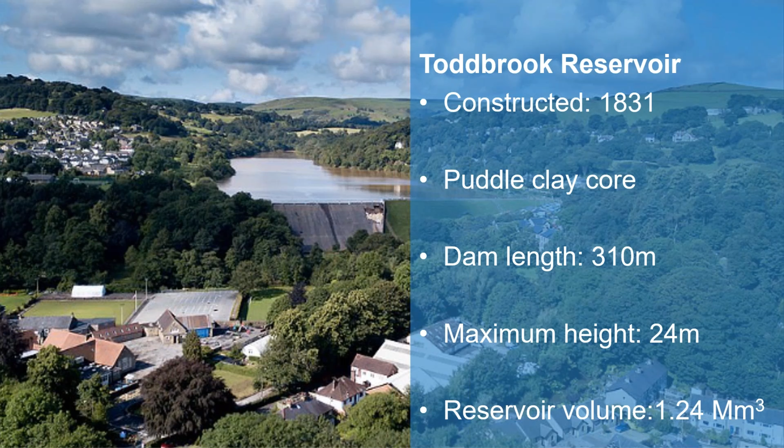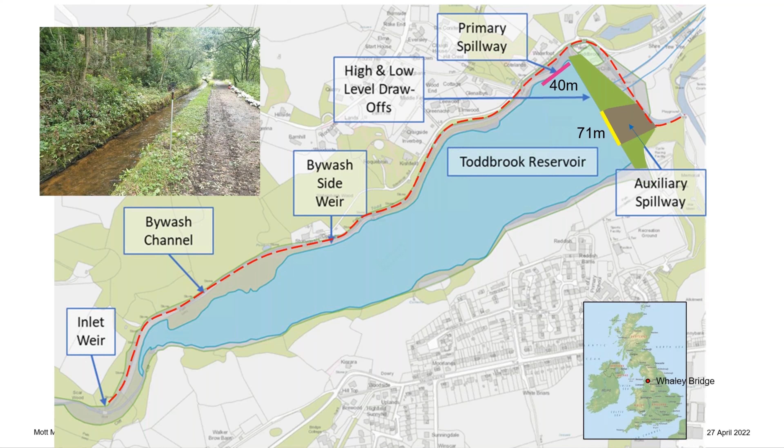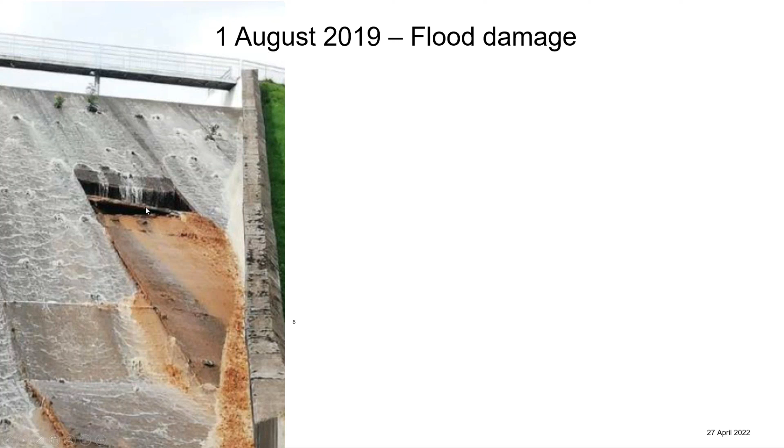Following the spill on the 1st of August, water started eroding from underneath the spillway, causing a scour hole, and some of the concrete slabs on the auxiliary spillway began to collapse.

In response to this, the inspecting engineer, CRT and police issued an instruction to evacuate 1,500 residents who live downstream in Whaley Bridge.

They then put in place emergency works to prevent overtopping of the damaged area, placing sandbags on the auxiliary spillway crest so water no longer ran over the crest into the scour hole, and then stabilized the damaged area.

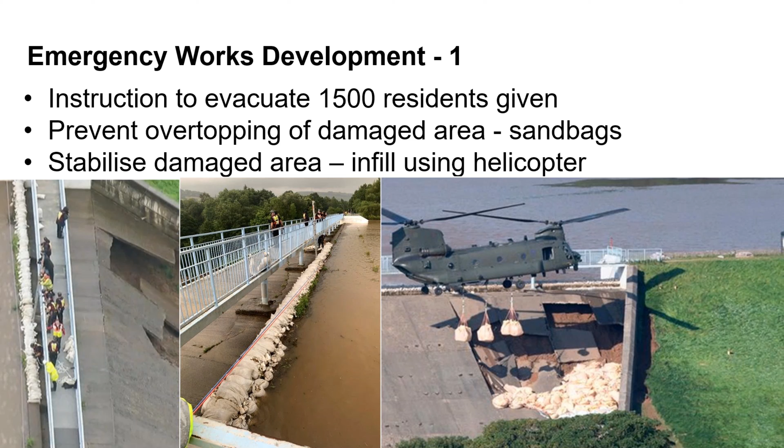This is a photo where a Chinook helicopter dropped aggregate bags into the hole and covered it with concrete to seal it up and provide a more stable situation.

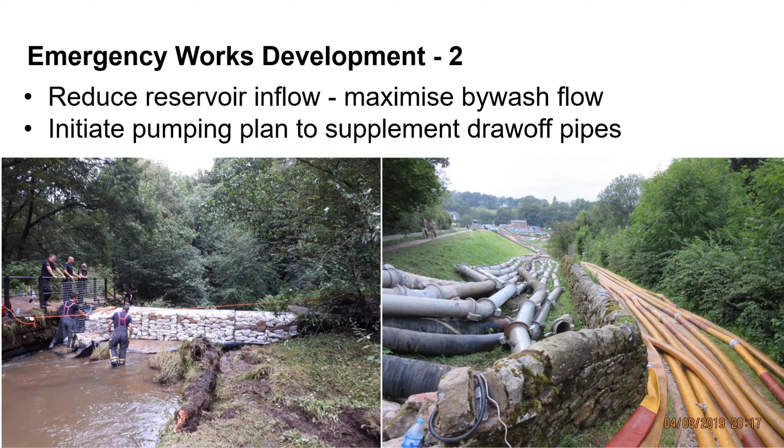They also put in place a pumping plan to draw down the reservoir level with a number of temporary pumps, including the fire service, who brought that level down.

The reservoir level was drawn down by 12 meters from top water level to about 4% full within 6 days. At that point, they carried out a hydrological assessment and dam safety assessment to confirm the situation was safe, allowing residents to return.

That assessment was completed on the 6th of August, and the residents were allowed to return on the 7th of August.

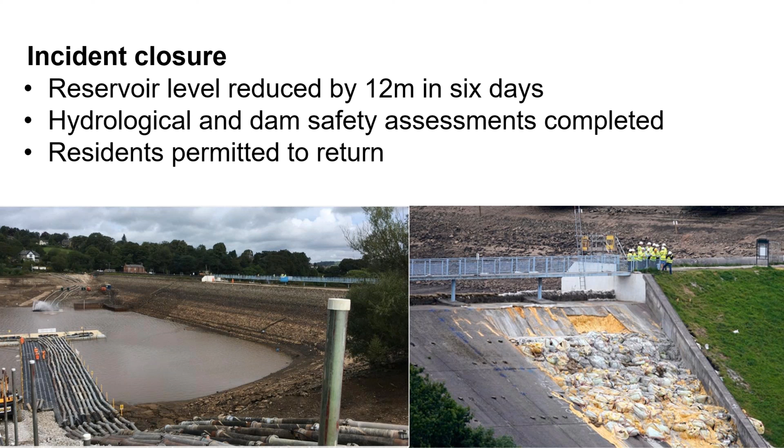After that, the pumps remained on site with the reservoir nearly empty. This is a photo of the submersible temporary pumps with the level drawn down.

They then maintained a full-time site presence to be able to respond in case the situation got worse or the level rose. It was a very active, high profile and high risk site, so there was a heavy site presence.

After that they put in place contingency planning to decide how to manage the site safely, and also worked out a more permanent solution to reduce risk.

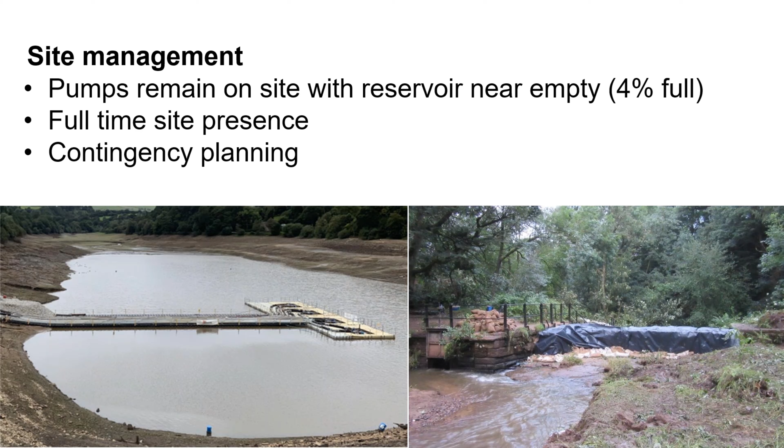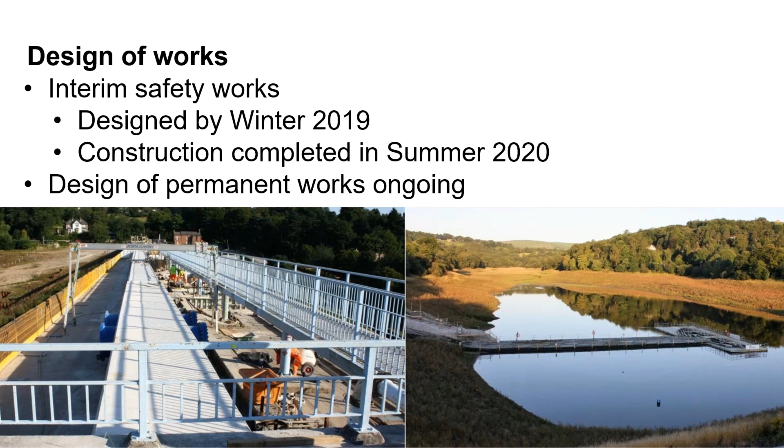So that's a dramatic story, but there's a lot of on-site work there. And how did flood modelling support the incident recovery work?

When we talk about this, the important thing to remember is what's the purpose of modelling. Modelling provides evidence to make better decisions with more confidence.

This is obvious with all cases of modelling, and it's particularly evident if you think back to the last couple of years and the government response to COVID, and how much of the decision making that people were making under high pressure had to be balanced and supported by the evidence that modelling provided.

Without that, if you're trying to make decisions in a high pressure situation and you don't have better information, you've got to trust gut feel, and it's easy to make decisions you don't feel so fully supported by. So this is a real benefit that modelling can provide in any sort of environment like that.

So in this case, we used Flood Modeller and developed a routing model. It was a fairly simple model, and Flood Modeller is very well designed for looking at this kind of problem. We've used it a number of times for reservoir safety work. In a very simple case, a reservoir routing model has four main components.

It has an inflow arrangement at the top, with the catchment flow into the reservoir. There's a storage element, which models the change in level with different changes in volume. There's an arrangement for the outflow of the reservoir, which models the outflow, and then the downstream boundary to take the water away.

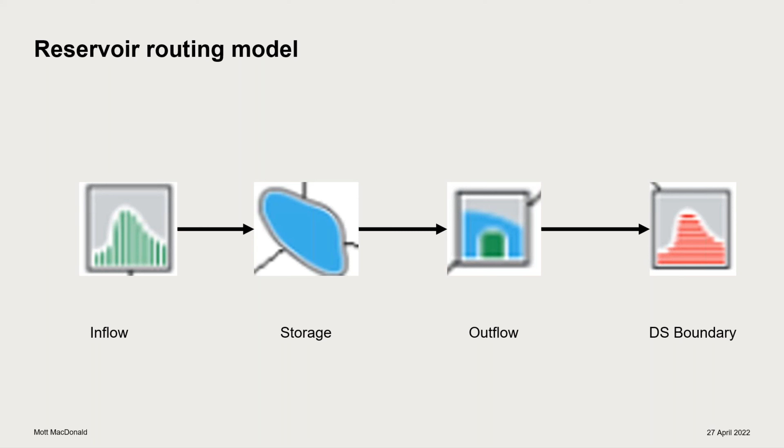And with that, we can estimate the risk of water getting to particular heights—for example, in Todd Brook, the risk that water will get over the primary spillway or the auxiliary spillway for rainstorms of different magnitude.

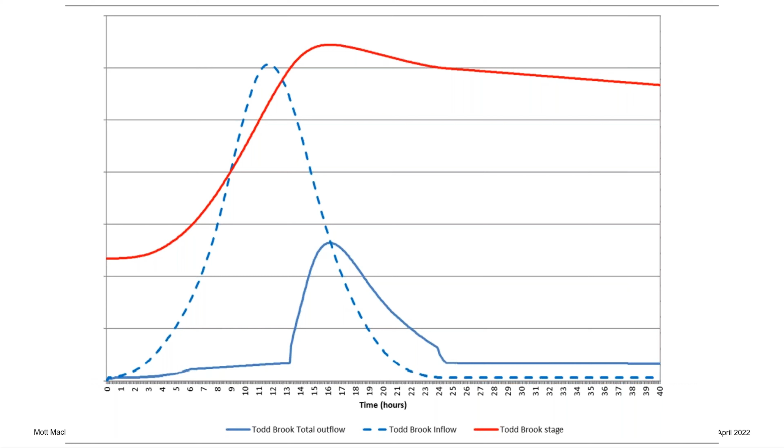So, the modelling timeline following the event: we were pulled into the team to work on the project once the reservoir level had started being drawn down. We were tasked with doing an initial hydrological risk assessment, mainly focused on how likely it was that the main dam would overtop, or how likely it was that the auxiliary spillway would work.

This was obviously a high pressure situation with a lot of media coverage and scrutiny, so we were very time constrained. We looked through the easily available data from CRT records and on-site measurements, and used theoretical estimates of things like rating curves to try and build a quick routing model.

This was very conservative—it didn't account for lots of the elements in the system, but it accounted for the main ones. We knew that was going to give slightly conservative results, which was fine, because in a case like this you want to assume the worst so you can make a better decision.

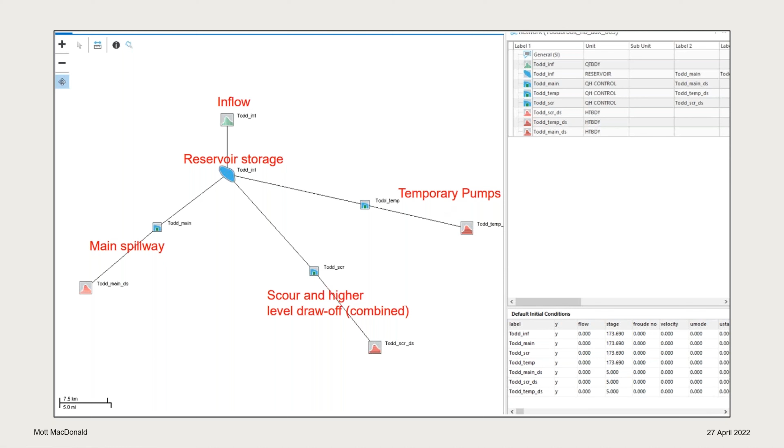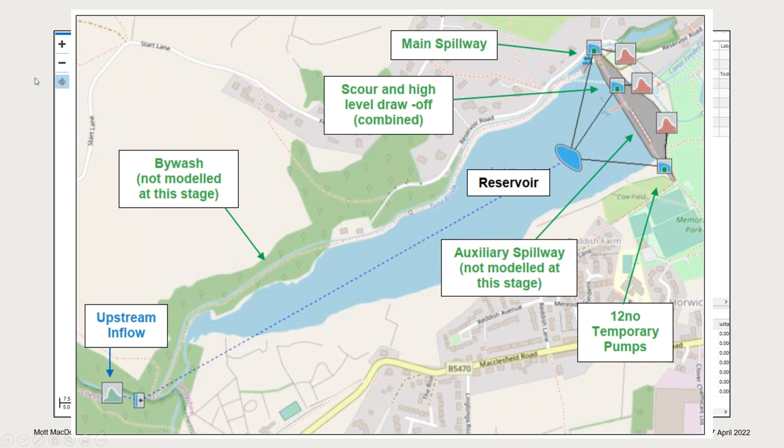But we knew there was missing information, particularly around the primary spillway and the bywash, which we identified as an important area for understanding the system. So we commissioned a new topographic survey of the bywash channel, but that would obviously take a long time to arrive, and we needed the information as soon as possible.

So we created an interim model where we went on site and picked up survey at the bottom end of the bywash. We did the survey in two different stages—first picking up the model of the survey at the bottom of the bywash, a critical area, which was available much more quickly so we could improve our estimates and give the site team more information. We added that key detail, and wherever needed, used conservative assumptions so we were always slightly overestimating the risk.

And we used that to develop initial site plans. This is a schematic of the updated model. The difference from the previous first stab at the model is this extra element we've added here on the primary spillway. As I said at the beginning, this spillway has a risk of becoming drowned out in some of the larger floods, if too much water goes down the bywash channel, it could back up and drown out this primary spillway.

We've also added an initial estimate of what the bywash capacity is using an abstraction unit from Flood Modeller Pro. This model effectively allows a certain amount of water to pass around the reservoir, so it doesn't get diverted into the main body, which is important because in each case here, we were assuming that the reservoir was drawn down by 12 meters, and it was all about how much the pumps could draw that water down.

We use this model to answer a lot of on-site plan questions and about the contingency plan, and to do some what-if questions. For example, what would be the benefit of reducing the number of submersible pumps on site? How would the system respond in floods if there were, say, 8 or fewer pumps on site, or if some were held back for redundancy, or whether the trust could scale back some of the pumps they had on site. I think they were costing about 17 grand a day to hire the pump system, so obviously there was a big driver to try and only be using the pumps we needed.

Similarly, we used the model to develop a rudimentary forecasting system. We ran the model for a number of floods with different rainstorms, with different depths and durations. That enabled the trust to have a lookup table, where they could look at the forecast rainfall, the depth and duration of that rainstorm, and then easily look up the level that the reservoir was forecast to get to. So they could start to have some confidence, and they didn't have to look so nervously every time it rained about how the reservoir would respond, but instead could understand when they needed to mobilize on site and warn the site team that there might be an issue, and when they maybe didn't need to do that.

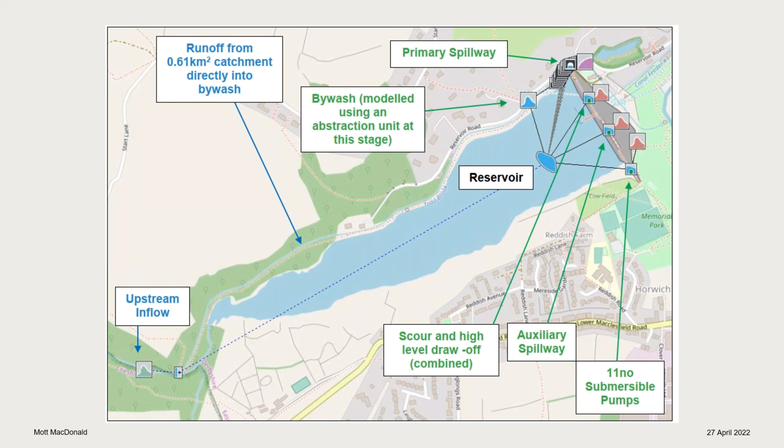Whilst we had that model, we were always aware that there were some uncertainties in it and some extra things which weren't included. So the topographic survey arrived, and we had that data at the beginning of October 2019 - about 2 months after the event. We used that topographic survey to fill the data gaps, particularly around the bywash channel.

At that point, we had a full model. We could do performance testing. We verified it to check that we were confident in the answers. Then we could repeat some of our initial work on the site plan to improve those estimates and answer a number of other questions. And as more data became available, we could continue to update that model with new extra bits of detail as and when it was needed.

This is a schematic of our updated model, and you can see this is what I would call the full model - this is where the modelers start to relax and feel like they've got all the information they need in there. The main difference here is this very detailed model of the bywash channel around the side of the reservoir, including some of the key structures along there, and also a better idea of the intake to the reservoir, and then some lateral inflows to distribute the water more realistically, or more appropriately, across the model.

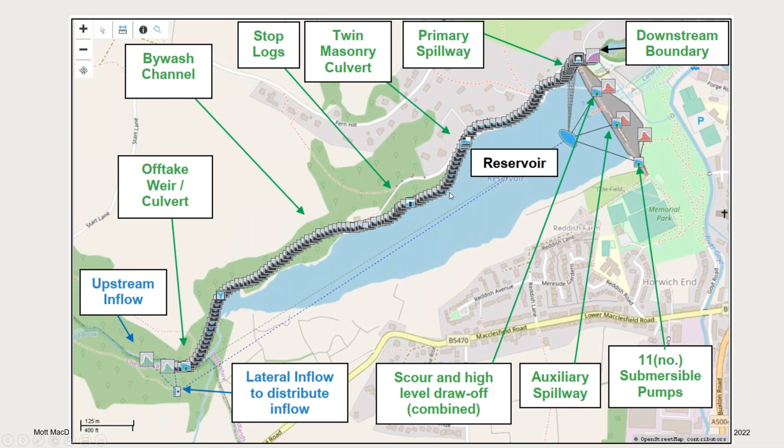So this detail looks really heavy on the bywash. It looks like we've got a lot of information here, but the main risk, we were doing this to try and target this main risk.

Which we saw in the temporary case, which is about the bywash. This is an example of a typical cross section of the bywash, which was put in with river units. You can see the channel is rectangular, and then next to it there's a footpath which sits between the channel and the reservoir.

And the risk and the concern was that by diverting all the water into the bywash, we'd be putting a lot more water than it was designed for through that bywash, and that meant there was a risk that water would overtop this footpath, would scour it away, and then would mean that the bywash no longer diverted water around it, but in fact all the water went straight into the reservoir, which would mean that it would all have to be pumped out, and it would mean that they had a lot less control over the lake level and the reservoir level.

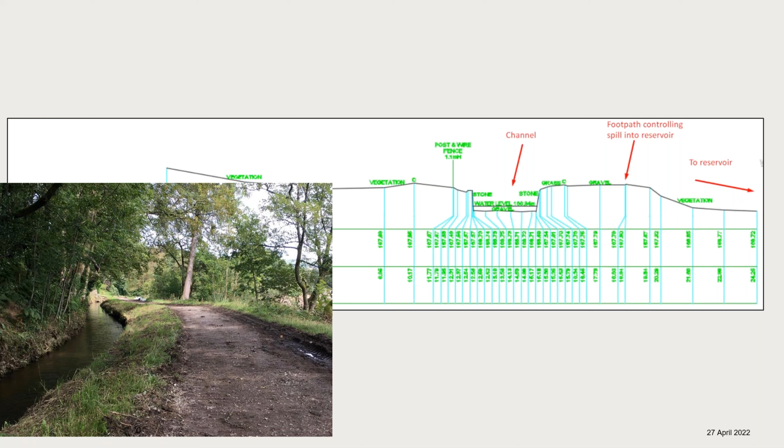So that's why we put all this additional detail in, and the model was really successful in achieving that. This is an example of the long section through the reservoir, through the bywash channel, sorry, and from there you can see it really highlights the locations of overtopping.

This blue line is the flow profile when the bywash is flowing full, and then the tan line shows the level of the right bank of that footpath between the channel and the reservoir. So you can see it highlights these locations where water is first likely to overtop, and then some other areas in other places.

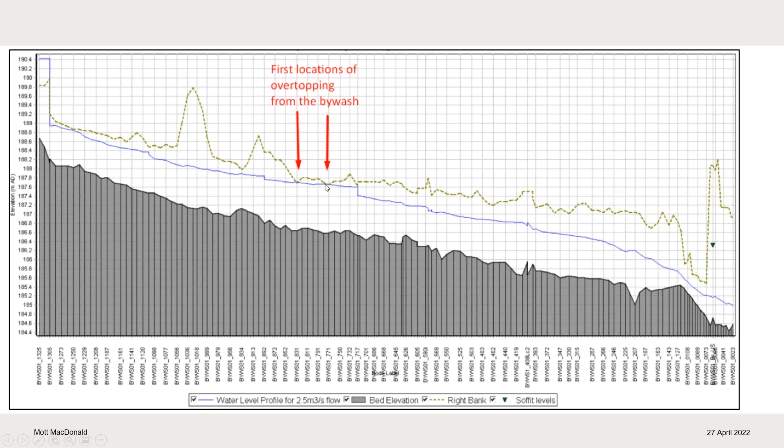And from there we could go on site, and the site team put up sandbags on the footpath, and then they could add that to the contingency plan, so that if there was a risk the bywash would be full, they could send someone there to mobilize on site and monitor it and react to the situation. So we could be a lot more targeted, because this bywash is about 1.3 kilometers long, so it's quite difficult to have a team there all the time to monitor every area.

We also used the model to site a new gauging station, which went through to the Trust's online system, so that it fed the data through, and then we could target that at the right location, the place where the water would be most likely to get out. We could use that as well to improve the flood warning system and develop something slightly rudimentary to be able to predict risk with a good lead time.

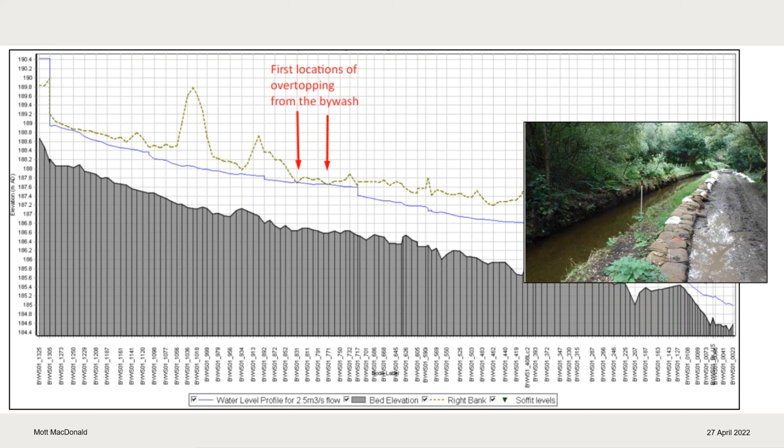With that final model, we could review our initial results and assumptions, develop the contingency plan, and we also used that model to design the interim safety measures, and provided the evidence for the government investigations as they went forward.

So I think in terms of reflecting on this, we used a real risk-based decision-making approach here, and it was sort of forced really, but it was a really good example because we were very time pressured. This is the way we had to adapt to it.

So if you plot these four stages on a graph, you can look at that over time. As we added more confidence, we gradually added more confidence and detail in the model. And in contrast, that meant over time we reduced the risk to the site. We were able to provide better confidence for people to make better decisions there.

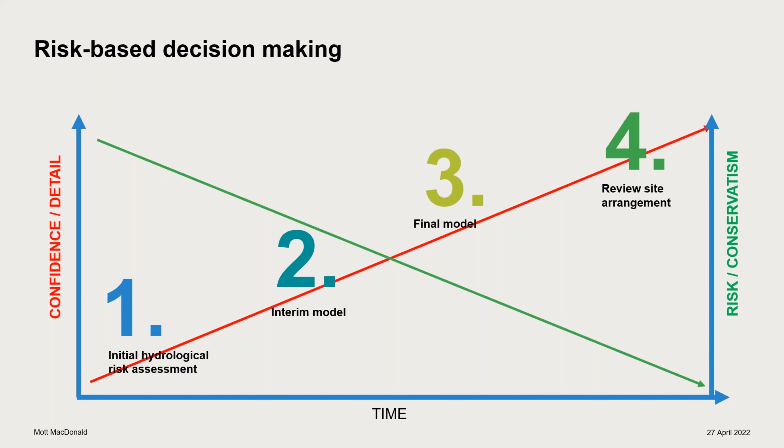That also reduced the conservatism that we had to employ on site. So for example, we could scale back the on-site team and the on-site works. That meant we could be more targeted and the response overall could be more cost effective. That was really supported by the benefits that modeling and the data gave to the trust.

Another reflection on this is a phrase which kept coming up in the conversations between the modeling team and the engineering team. This is one of the real benefits, I think, and a takeaway message from me from this project: risk awareness is better than risk aversion.

The way we were set up, because we were all pulling together in the team to resolve the situation, there were really sensible and mature conversations between the modeling team, the engineering team, and the clients. We were all communicating really well, and it was great that the modeling team were involved in the conversations and the delivery of the response.

We were sort of embedded deep in that team, and that meant that, whilst we didn't have all the information at the time, at each stage we could highlight the areas we knew we didn't know, and we could then make the right representation we could, but we would always be able to communicate that risk back to the design team.

So for example, we might not have all the information about the bywash, but let's agree the decision we're going to take, and then let's understand together what that might mean. So for example, we might be underestimating something, but that might mean we're overestimating the reservoir level, and so we should be interpreting the results in that way.

So what can modeling teach us about the incident? Modeling can be used after an event, in this case to review what's happened before, to test our assumptions and test what we did, and to try and learn for the future. And in this case, Toddbrook is such a huge, nationally significant event that there's a real benefit in doing this.

So as we were reviewing the site afterwards, we were struck by how critical the bywash was in reservoir safety. The model predicts the bywash would convey about 2.5 cumecs constantly around the side of the reservoir. That's equivalent to about 12 of the installed submersible pumps on site. So the presence of the bywash meant that they didn't need to be running the pumps continuously, and that had a significant saving of cost and carbon to the trust.

And it also meant that you're basically bypassing the base flow around the reservoir. So in the event, it meant that you were pumping less volume, and you actually had less reservoir volume in the reservoir to pass over the auxiliary spillway.

And with our work in reservoir safety, all too often we're encountering issues where bywash structures are poorly maintained, they're vandalized, or they're deteriorated. And this incident provides us with a really good opportunity to quantify the benefits of the bywash for future management, particularly in terms of the benefits during an emergency situation. And this is something that we looked at and presented with the trust in the paper in the ICE journal, Dams and Reservoirs.

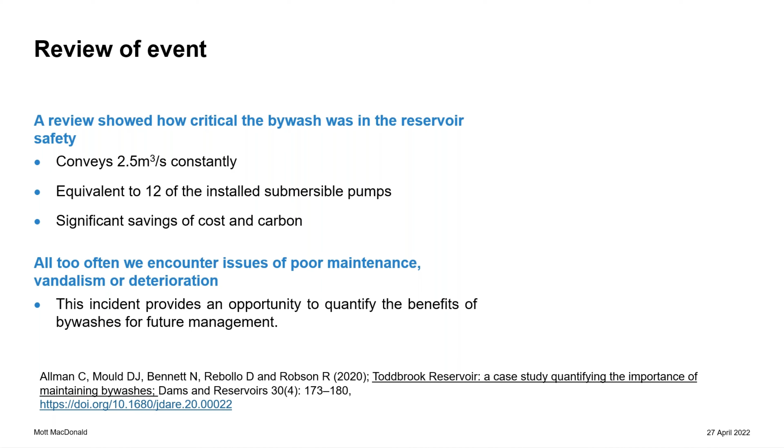So to test this, we used our existing model and looked at two what-if scenarios. Firstly, we looked at, for this event, what would have happened if the bywash hadn't been operational at all, for example if it had been left to go and no flow was able to go through it. So in this case, we removed that channel from the model, and all water just went straight to the reservoir and had to pass across the primary or auxiliary spillways.

And secondly, we looked at a second situation where the bywash was in poorly maintained condition. So in this case, the capacity was halved, and we compared that to the capacity of the bywash that the model predicts in its clean and clear situation.

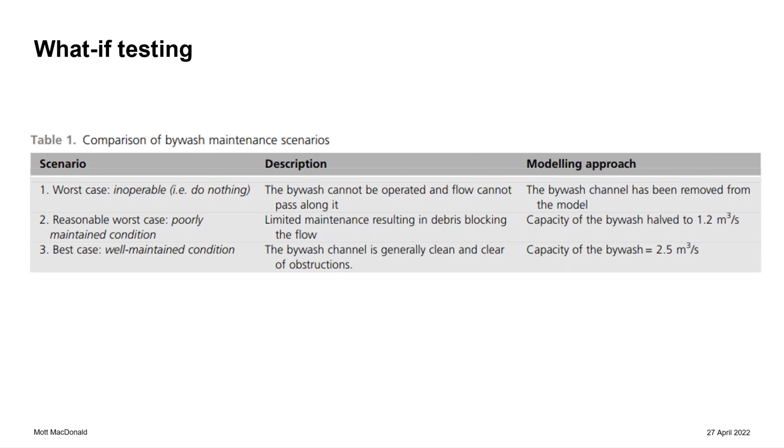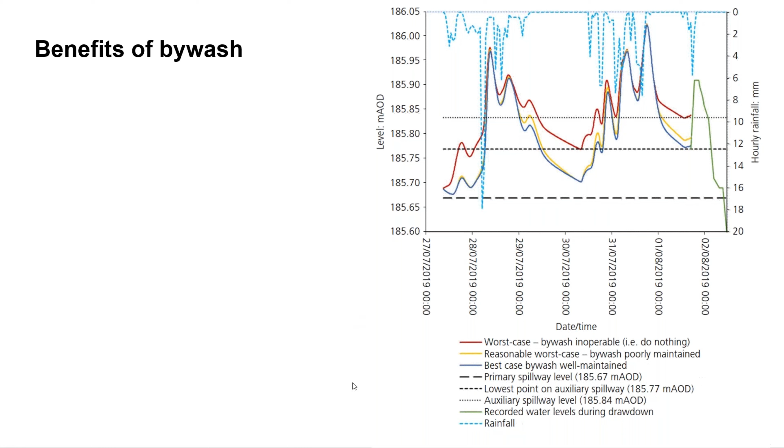But we ran that model, so this is our nicely clean 2.5 cumec bywash channel. We ran it as well for 2 further situations, which I just described. And this is the response. This is how the model predicts the reservoir level would have responded in each of those cases. The first thing to say, I think, is how clear it is how much of an impact the bywash channel had on the reservoir level, particularly in this case of the do nothing situation.

So the model predicts that if in this situation the bywash hadn't been there, or perhaps as well if something had failed and it had become blocked for some reason and it wasn't able to be used, the reservoir level would have risen, and it would have overtopped this auxiliary spillway for a long period of time, from the 28th of July all the way through to the end of the model run. And this would have put a lot of pressure on the auxiliary spillway.

And whilst the actual peak level of the reservoir didn't change in the model as a result of the bywash, it means that the auxiliary spillway would have been passing flow throughout the whole period, and more volume and more flow would have likely caused more significant damage.

And there's another implication here: the runs here in yellow show the smaller, lower capacity bywash. And the results of this are surprisingly similar to the bywash with a larger capacity. It implies really that the presence of the bywash on its own, to pass the base flow and pass water around the side of the reservoir away from the main body, would have had a benefit on its own. And I think that this is a really interesting implication more widely for management of reservoirs.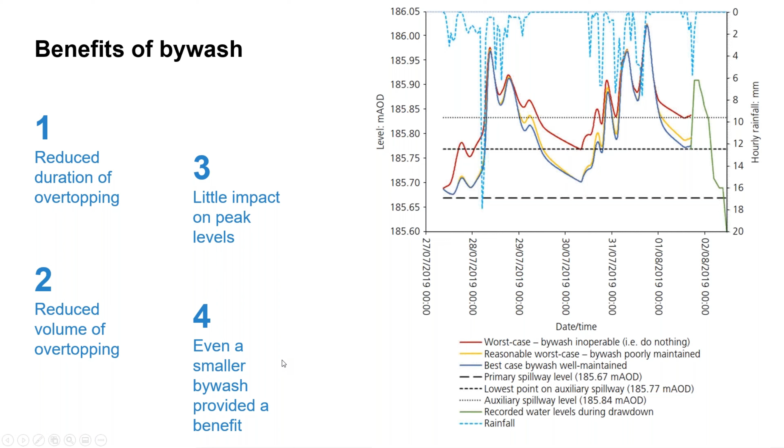And I think it highlights that, in my mind, the bywash is a bit of an unsung hero, really, in this case. But that's the benefit that modelling can give us for reviewing and hopefully taking forward lessons more widely. So, what can I take away from this for my next project, or for your next project?

So Toddbrook Reservoir is an incident of nationally significant reservoir safety. It will influence policy going forward. And it's an important reminder that whilst we do a lot of these flood studies and reservoir safety assessments, there are real world connotations and implications. And reservoir safety design is one of the most important elements that hydrologists and flood modelers can work on, just because of the safety implications.

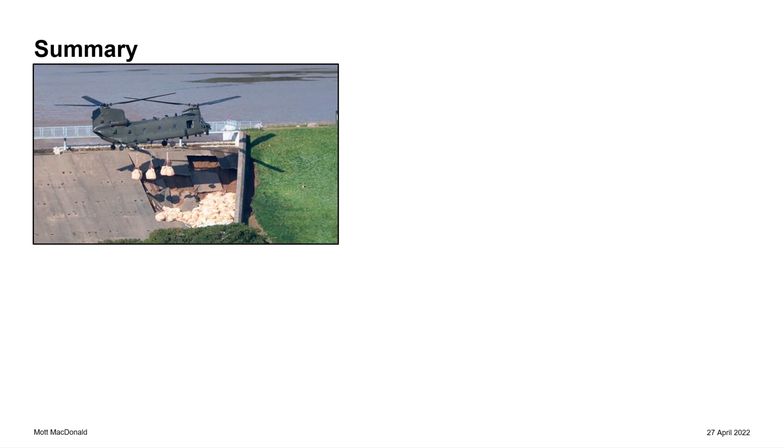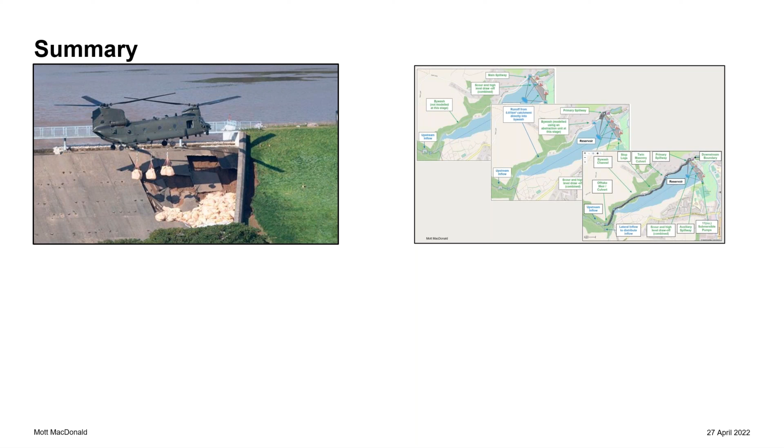In this case, it made national news, and it led to 1,500 people being evacuated for 6 days. It's a very significant risk. We responded to this with modelling, providing support to the decision makers to help them understand how they can safely manage the site. And over time, we gradually added more detail to that model to give people the ability to make those decisions with more confidence.

We used a risk-based decision-making process. So as we added that extra information, it allowed people to make less conservative decisions about how to manage the site, and that meant they could make a more cost-effective and targeted response to managing that site. At the end, we can use modelling as well to look back and review what's just happened, and to reflect on what maybe we could do better next time, or how we can manage situations better in the future.